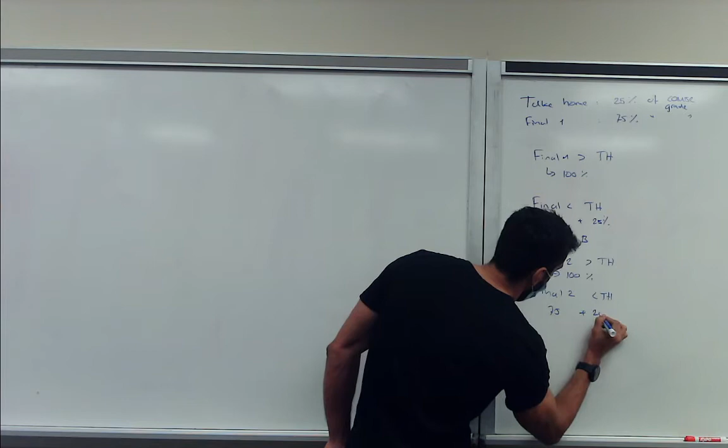So, okay. Say, for example, if this is, say, a B or so, and you're not satisfied, you can opt in to take the final two exam. And then the same principle applies. If your final two is higher than your take-home, then it's 100% of your grade. And if your final two is lower than your take-home, then it's again 75% plus 25%. And if you still fail, then you fail. Then I see you in the fall semester as well.

So, say for example, you got a B here, you got a C here. So you just had a bad day. Then this still is valid. So, in theory, your second final cannot hurt you. But I do ask, if you're gonna do this exam, just take it seriously. So don't just show up and do the exam, because it just gives me extra work.

So if you're not gonna take it seriously, if you're like, I'm satisfied with a B, just don't do it. Saves me my time. But you're free to do it. So I cannot stop you, I won't stop you, but I just ask of you: if you're gonna do it, make sure you study for it and you take it seriously. So it's not something just adding work for me.

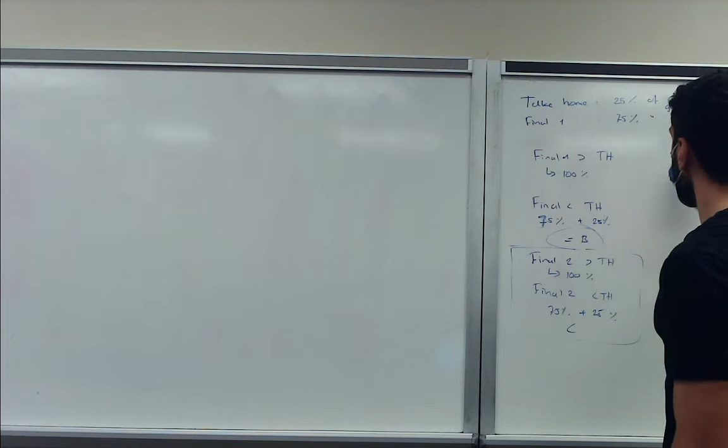It's a very unique grading system. Yeah, it is. It's definitely something that you don't often see here. And the reason is, I really don't like homework being part of your final, because I think homework should be something that you do on yourself to make sure that you learn the topic in a proper manner.

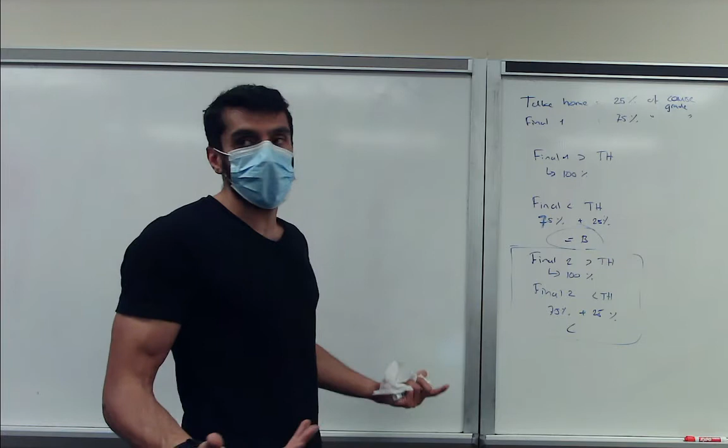And the same thing, why I don't do just one final. I think here in the US, because you fail and you have to wait a whole semester, I don't think that's fair. Everybody can have a bad day. I've had bad days where I know a topic and just go into the exam and have a bad day and I fail. So I don't think that's fair either. So I think in this way, you can get something of the homework. So it gives you incentives for doing the homework or the take-home exams and doing well on those.

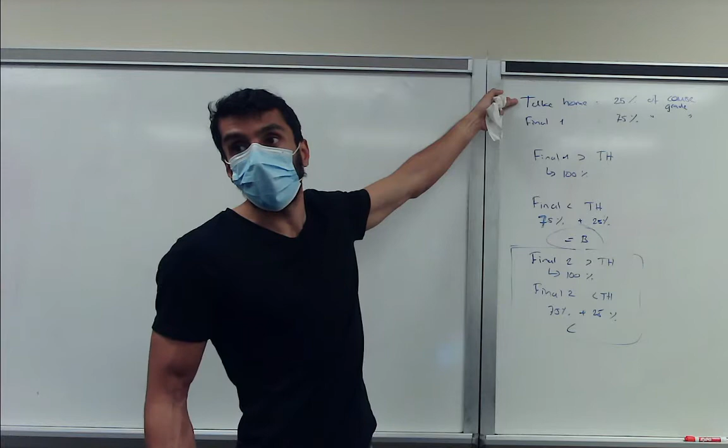And at the same time, if you have a bad day during the final, you always have some catch up. And sometimes you didn't get it, but the final will be comprehensive of all the topics. So if you can showcase on the final that you understand all the topics, I don't think the take-home should bring you down just because back then you didn't understand it fully. So I think this is in the benefit of all the students, and gives you incentive to do the homeworks, and also doesn't punish you if you just have a bad day. That's a very good reasoning.

I like it. Okay. So for today we're gonna continue doing some problems. I'll focus on one shear and one torsion. I'm gonna focus on the torsion, so I would definitely wanna get that in as well. And the shear problem, worst case scenario, if we don't finish it, yes, sorry.

Will the final be in class or online? I haven't decided. Originally, it should be in class. That's my preferred. Given the situation, the university sent out that everybody should be back in school, but there's still people not vaccinated and stuff like that. So I don't want to risk anyone's health. So it might be again a take-home exam. If it is a take-home exam, it will be limited to 6 hours, so there will be a bit more time pressure. And it will probably be 6 hours in which the class fits.

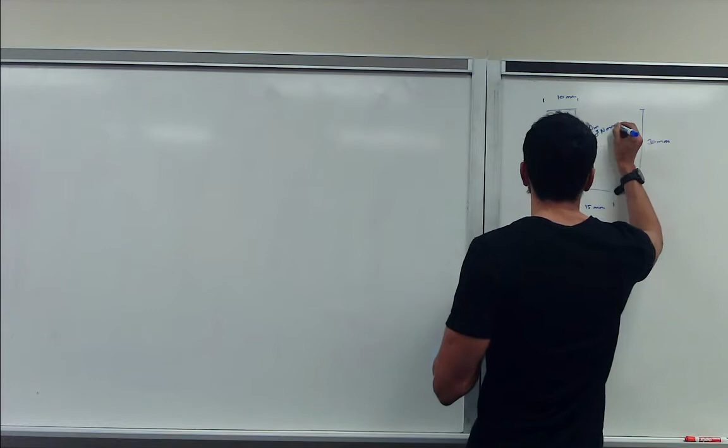So let's go for our Z section again. In this case, this is 10 millimeters, this is 15 millimeters, and the height is 30. You have a couple of things given: we know there's a torque acting upon this section of 100 Newton meters, that's 100 times 10 to the power of 3 Newton millimeters. One thing we always suggest is whenever you have given problems or variables, stick to one unit. I think millimeters is always the best option, especially for shear flow problems, unless the numbers get very large, like 1000 or 2300, then go for centimeters or meters in the worst case scenario. But yeah, this is what I would do.

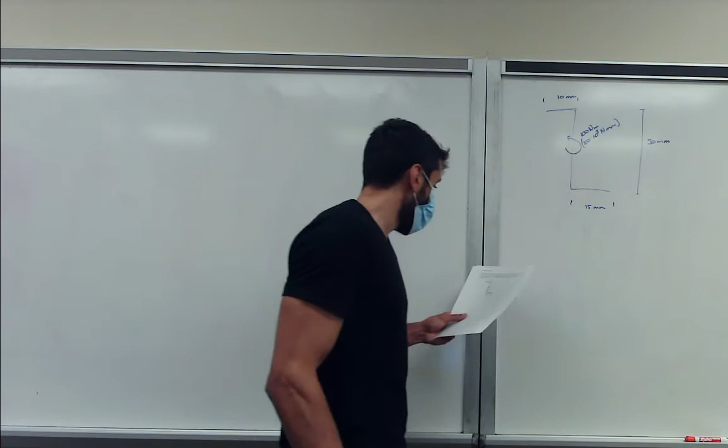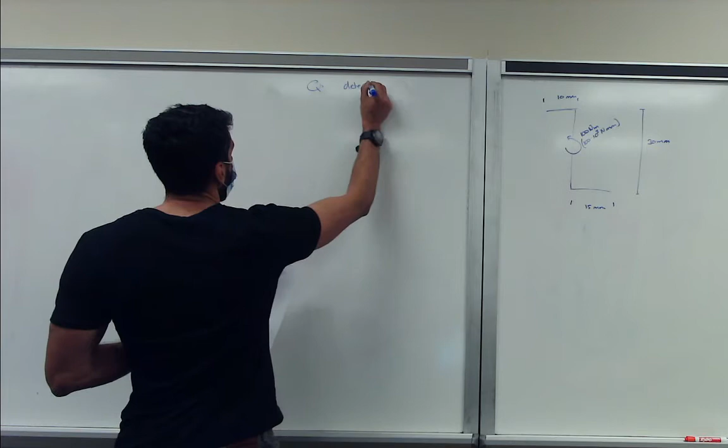So the question is, let's write that here: determine the shear modulus of the beam. So we don't calculate any shear flow etc, we basically have to calculate what the shear modulus is, and that's G. It will pop up in one of the equations, so we can isolate that and determine it.

So a couple of things are given: first of all, thickness is 1.3 millimeters everywhere. We also have given that if we apply that 100 Newton meter torque to it, and the beam has length L of 0.7 meters, it rotates a theta of 1 degree.

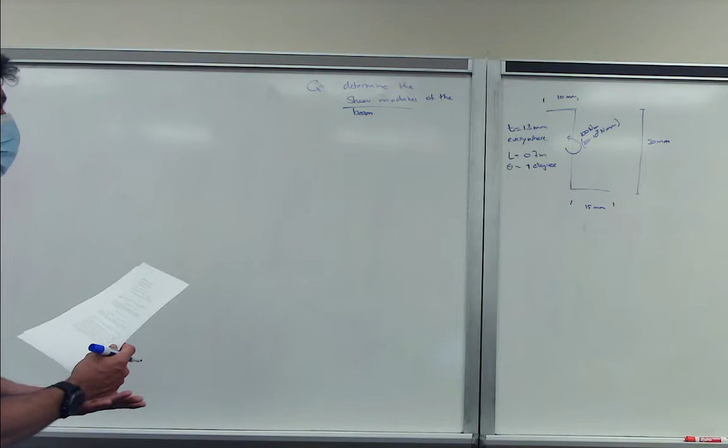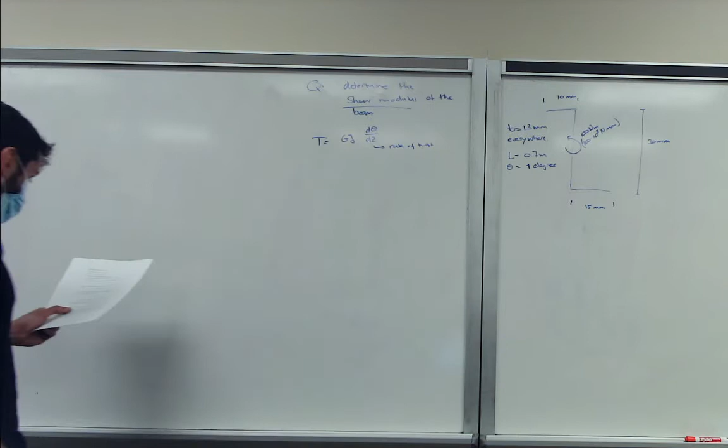So this is what we have to do, and there are a couple of steps we can use to solve this problem. First of all, the question is basically to determine the shear modulus. We know that torsion is equal to the shear modulus multiplied by the torsion rigidity multiplied by d theta dz, and this is our rate of twist, which is rotation per unit length, or rotation per meter.

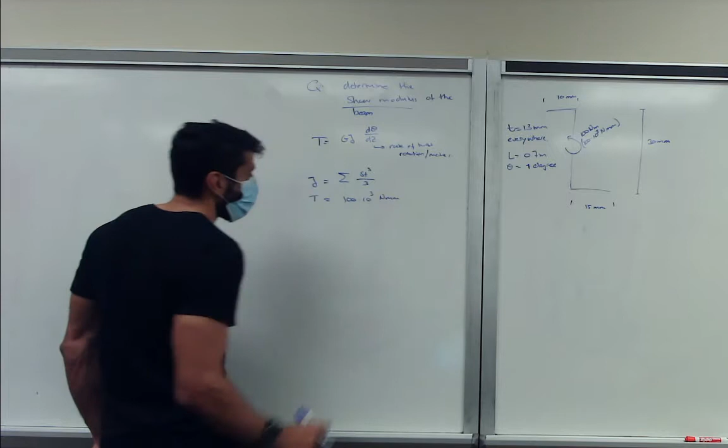If you look at the equation that comprehends this problem, we have torsion, shear modulus, torsion rigidity, and d theta dz. D theta dz we can determine from the length and the degree of rotation. G is the unknown. The torsion rigidity we can determine, that's equal to the summation of st cubed over 3. The torsion is already provided, 100 times 10 to the 3 Newton millimeter. Shear is unknown, and d theta dz we have to determine.

D theta dz in this case will be 1 degree of rotation over the length, which is 1.429 degrees per meter. We have to convert to our standard unit, radians, so we multiply that by pi over 180 to get the correct units. This gives us 0.025 radians per meter, or if we're consistent and go to millimeters, we get 2.5 times 10 to the minus 5 radians per millimeter.

So basically what we have is one equation, one unknown. We can solve for it. Very simple. So let's also fill in our torsion rigidity.

That's J. There's an open section thin wall beam, so it's basically the summation of S times T to the power 3, where S is our segment, T is the thickness of the segments, over 3.

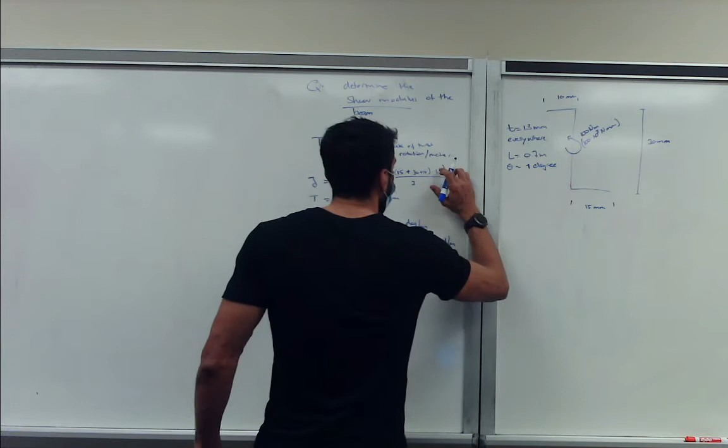instead of 1.5. Which are you talking about? The thickness is 1.3 millimeters everywhere, but you put 1.5. Oh yeah, you're correct, I don't know why. 1.3. But the answer is still correct, 40. Yes, it's 1.3 in my work notes.

So that's equal to 100 10 to the 3, over 40.28, multiplied by 2.5 times 10 to the minus 5. And this will give us a number of... let me see, yeah, 9.9 times 10 to the power 7.

And since we are working in millimeters and newtons, this gives us Newton per millimeter squared. So there's actually a follow-up part of this question: does this make sense?

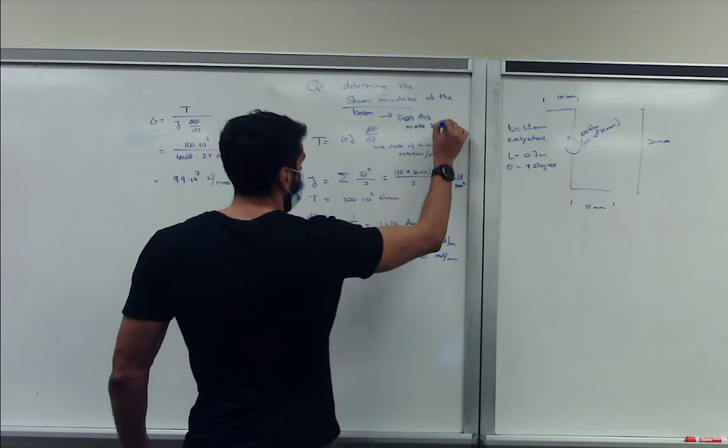So we have 9.9 times 10 to the power 7, which means this is Newton per millimeter squared, which is megapascal. So this is 9.9 times 10 to the power 7 megapascal. If you convert to gigapascal, it's 9.9 times 10 to the power 4 gigapascal.

And then you should basically see that this does not make sense. There's no material that has such a high shear modulus. You have to think about it, like... did I write it down? Yeah. So steel, for example, the shear modulus is around 80 gigapascals. The shear modulus of aluminum is around 25 gigapascals.

So if you want to basically design this beam for that kind of load and that kind of rate of twist, it's just not possible.

So what you do is basically, what you go from here, is you could plug one of these G's in and determine, for the length and for the torsion, what the rotation angle would be. You can plug it in and reverse engineer the rotation angle, and then you'll realize that with this load again and this length, that would also not make sense, because then the structure would rotate like 7 times.

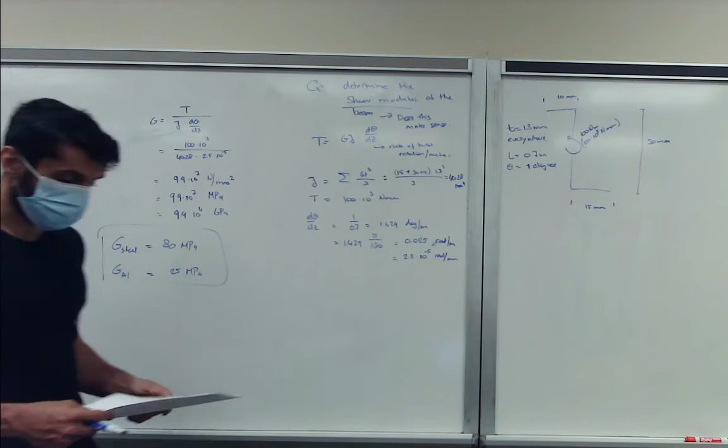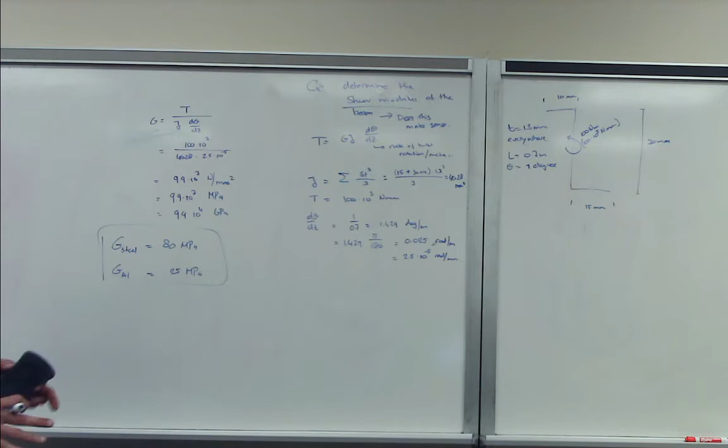And I realized actually when making the exam, or trying to make the exam, that with torsion they will be somewhat limited because we haven't discussed multi-section problems, and that's where torsion often comes into play as well. So I will ignore that section and just focus on the torsional problems we discussed so far in class, and I don't want to bring up any new problems before the exam.

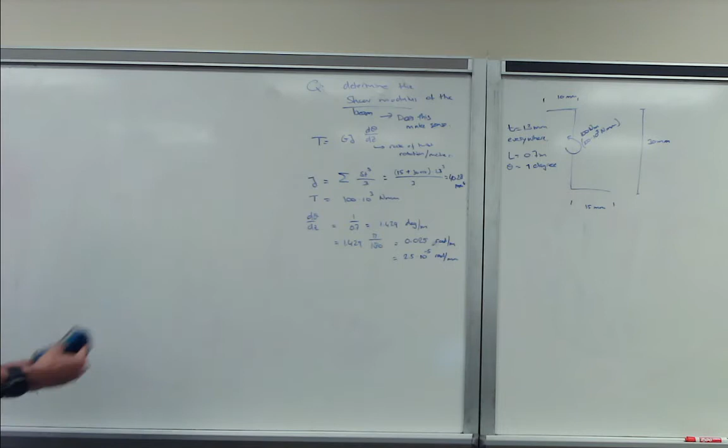So with that said, you can assume that it will be heavily on shear, and there will be just one problem maybe with torsion related to it.

After this lecture, or after this exam, we'll also go into multi-sections. What happens if we actually have a wing structure with multiple cells, say cell 1, 2, 3? We'll discuss that, and torsion and rate of twist will pop up again. But for now, that's basically ignored.

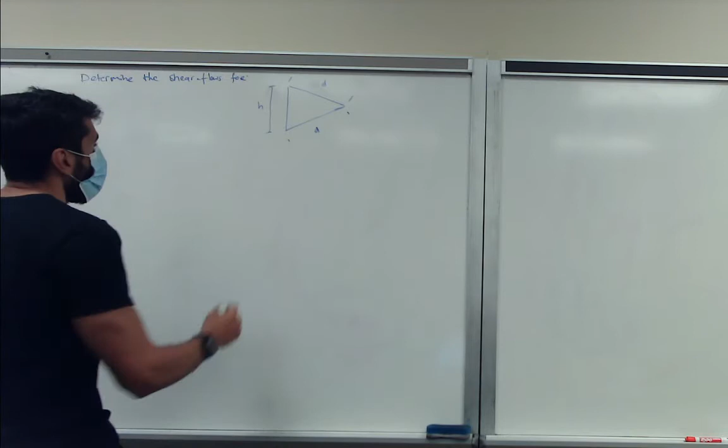With that said, let's do another shear flow problem. The question is: determine the shear flows for the given structure. We have a certain structure, a triangle. This is height h, and this is length d. This length is similar, so this is d as well. And we have a shear force acting on it at this location.

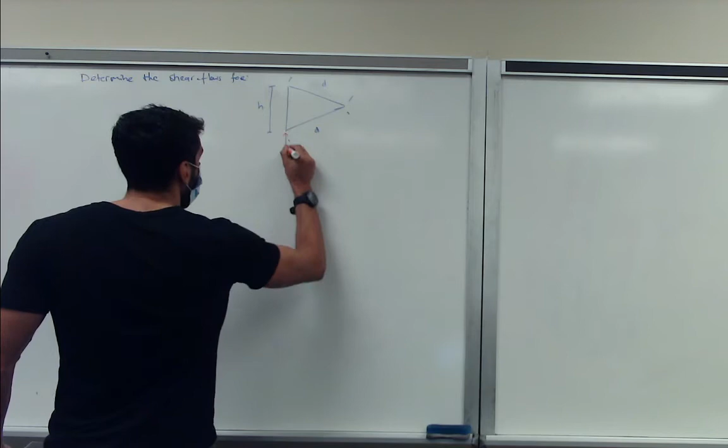Based on geometry, we have a closed problem, a closed section shear flow. So we know we have to make a cut to open the section, find QS or QB, find QS0, and add to get final results. So this will be QB plus QS0. That's the steps that should come up immediately into your mind, so that will be our procedure.

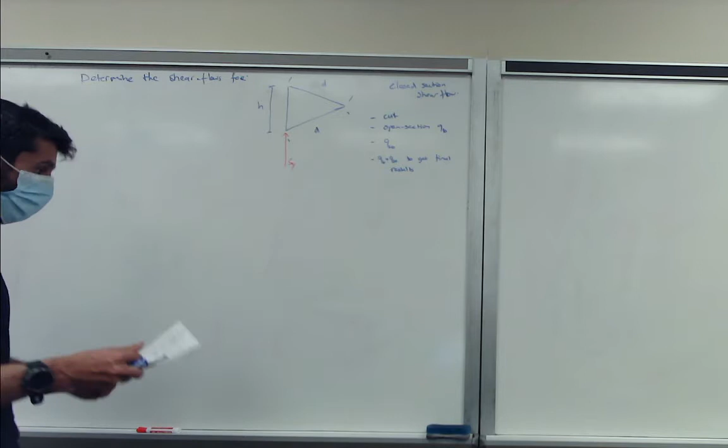Let's analyze our problem in more detail. So we have our solution procedure. What do we know about our shear flow problem? Well, we know it's symmetric. We have one axis of symmetry, so let's use that. We have no shear force in the x direction given, so we can use that as well.

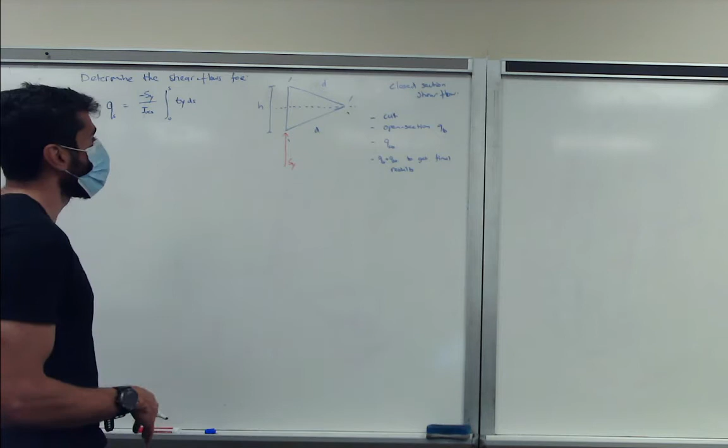So our shear flow equation becomes minus sy over ixx, integral from 0 to s of y ds. Since this is the equation we can utilize, there's no need to calculate moment of inertia yy, because it's symmetric, ixy is 0. So: symmetry, ixy 0, no sx given. That's also an additional observation that we make.

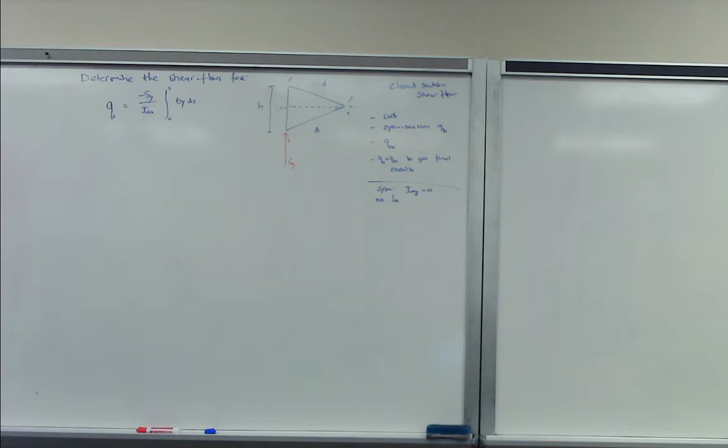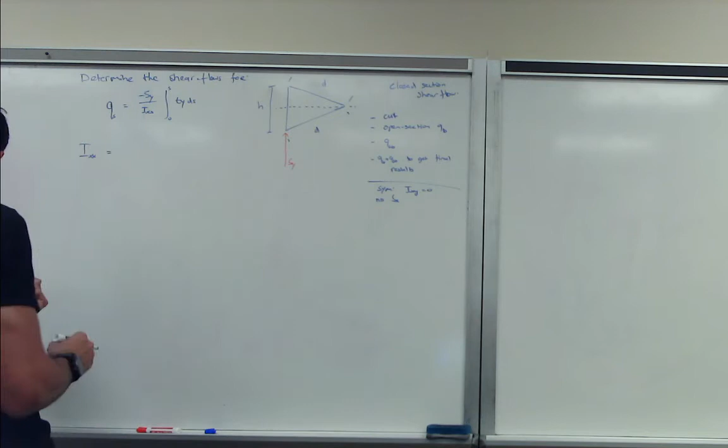So let's calculate the moment of inertia. In this case, we have our straight section that we can use with basically 1/12. And then we have to deal with the sections. Let's give them names as well. Let's call this point 1, point 2, and point 3.

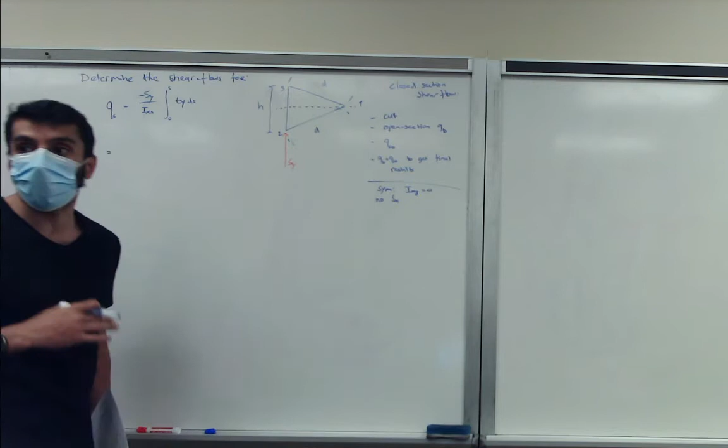Do I need to find the centroid first? No, because the centroid is with respect to y, and we know it will lie around the x-axis, so we can easily find it. The centroid will be somewhere here, but since we're not dealing with any y disturbance, we don't need it.

So let's calculate. The 2-3 section is easy, that's 1/12 bh cubed. We also have to define the thickness, which is everywhere t. So in this case it becomes 1/12 h cubed t.

We know from our second moment of inertia lecture that the moment of inertia ixx of our cross section equals the moment of inertia xx in 2-3 plus moment of inertia xx in 1-2 plus moment of inertia xx in 1-3. We also know moment of inertia in 1-2 equals moment of inertia in 1-3, based on symmetry. So we basically have to calculate what 1-2 or 1-3 is. Let's do that.

So for 1-3, let's go with the integral format, y squared dA. There's a formula, and you have to be careful with how the picture is given on the formula sheet, because there's an existing formula to determine this immediately based on the variables given, so you don't have to do the integral format. But I want to emphasize feeling comfortable doing the integral format, so we have to define what y squared will be.

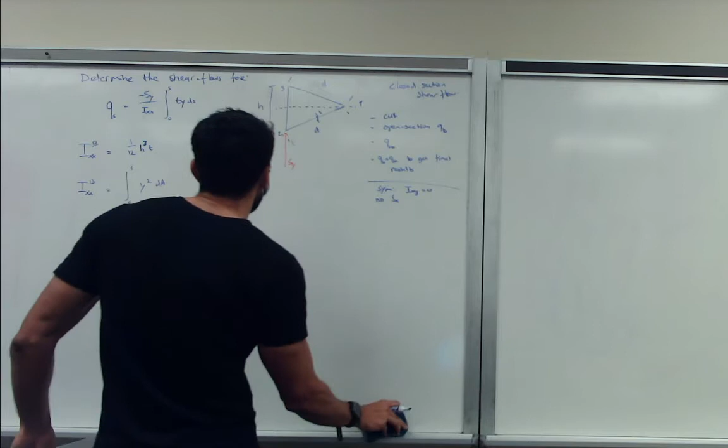So let's look at the cross section again. We have a geometry with central symmetry, so we can define this as alpha. If we define this as alpha, then y is equal to... if we go from S1, in this direction, this will be equal to S1 multiplied by sine alpha.

So one step is calculating sine alpha, or just going with sine alpha. Another step is, how is sine alpha defined? Well, sine alpha in this case is defined as h over 2d.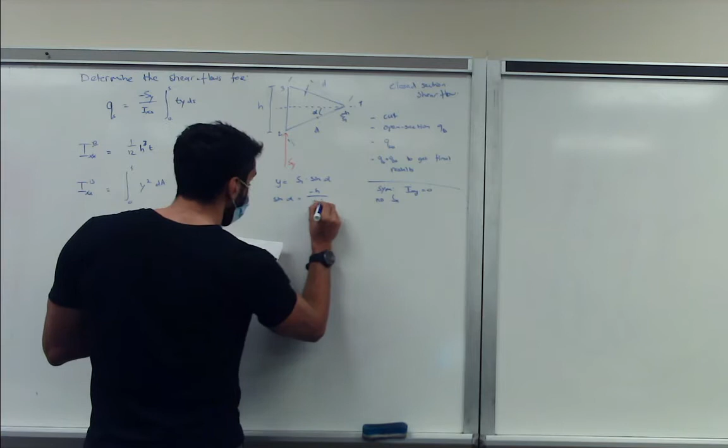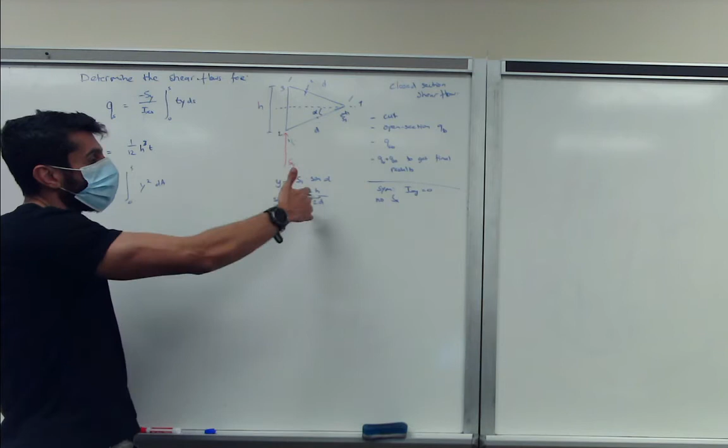So let's do that. And then, of course, our segment bound goes from 0 to s, which goes from 0 to d. So our integration bound, if we fill this in as well, goes from 0 to d. And then we fill in this equation. So if we do it correctly, we get S1 times sine alpha squared dA. This becomes 0 to d of, now we substitute sine alpha, S1 multiplied by minus h over 2d, squared.

And the area is nothing else than t times ds. If we take a segment on this line, this area, if we blow it up, that's the thickness multiplied by our segment ds that we take out. So our dA becomes t times ds. So that's a coordinate transformation that we apply here. So we get t ds1.

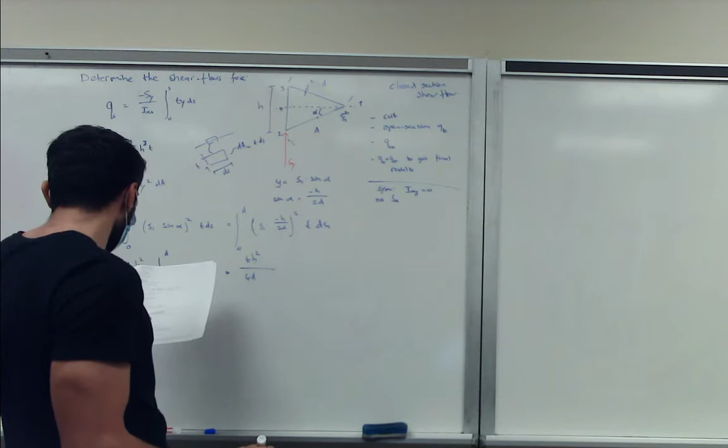s1 to the power 3, evaluated from 0 to d, of course. So if you plug in 0, it's 0. If you plug in d, what we get is t h squared d to the power 3 over 1/3 times 1/4, so that's 1/12. And here we have d, so we can basically cancel out one d, so this becomes d squared, and this d disappears.

So why was the d in the denominator not squared? It should be. And this becomes here. That's correct. So yeah, there should be a d squared here because we multiply this squared sine. No, you're correct. It was a mistake on my side.

So now we know the moment of inertia for our cross section. Let's just call that Ixx. So it's 1/12 h cubed t plus 1/12 h squared t d. And then you can simplify it a bit. Sorry. This is for segment 1-2, so this must be multiplied by 2 because segments 1-2 and 1-3 are the same. So we use that to our advantage. So that's the 2 here.

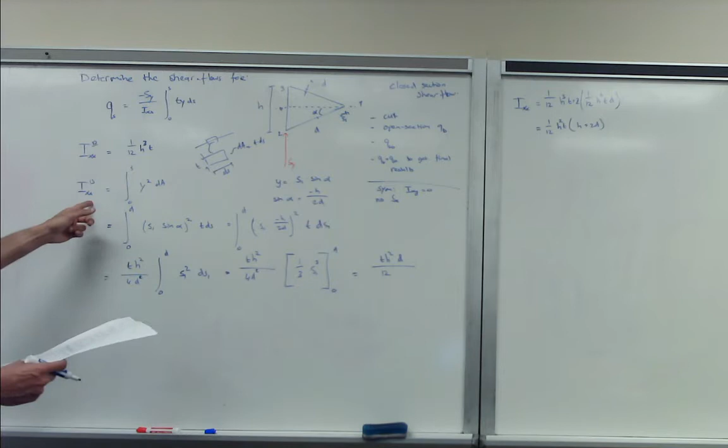So importantly, it might seem like a very complicated structure to calculate our moment of inertia from, but the total moment of inertia is nothing else than the summation of the components. So the 1-2 section, then the 2-3 section. The 2-3 section is directly obtained by 1/12 h cubed t, and then for 1-3 we said 1-3 is equal to 1-2, and we can calculate that as well. And then at the end, we just summed up the different components. So now we have our moment of inertia.

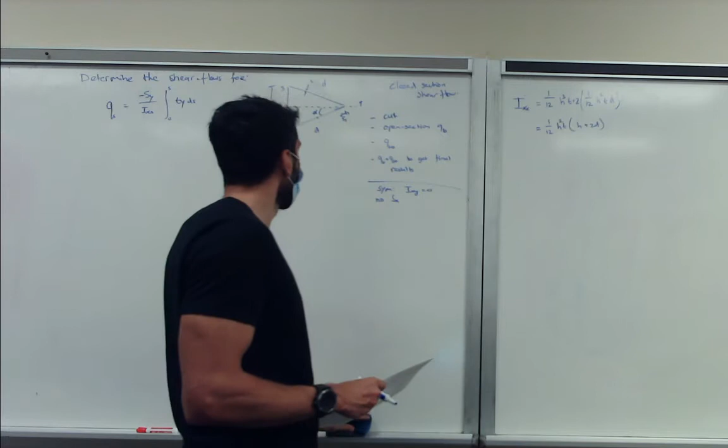The next step is basically following this procedure that we wrote down here. So we're going to make a cut, we're going to do open sections, we're going to find the correct shear flow. So let's do those steps now. And then the question is, where are we going to make a cut? As mentioned in a previous lecture, we want to do it around the symmetry point, so we can make our life easy. So the best location in this case would be at point 1. So we can calculate 1-2, or 1-3, and then 2-3, and then the rest we can find by symmetry.

So we know at the starting point, qb1, that's of course our cut, so that's equal to 0. So now let's do segment 1, 2. So qb12, that's equal to our starting point, which is 0, so we ignore that, plus this section. So that's equal to minus Sy over Ixx. What's that? It's 1/12 h squared t (h plus 2d). And then we have to evaluate the integral from 0 to s for segment 1, 2, and we multiply by ty ds. So 0 to s, ty ds.

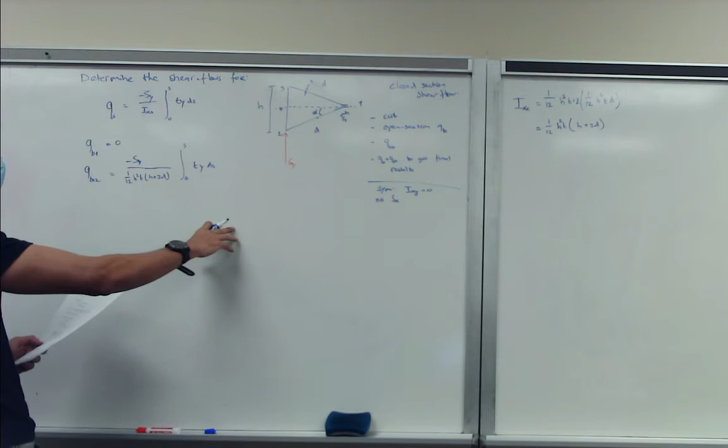So in this case, we already identified that y is equal to s multiplied by sine alpha. And we know for s1, that's equal to s1 multiplied by minus h over 2d. So what we can do is just substitute this into here and then do the integral from 0 to d, ds. Okay, so we plug these values in. So Sy over 1/12 h squared t (h plus 2d). Now we substitute our new value for y. So it becomes 0 to s, t s1 multiplied by minus h over 2d, ds1.

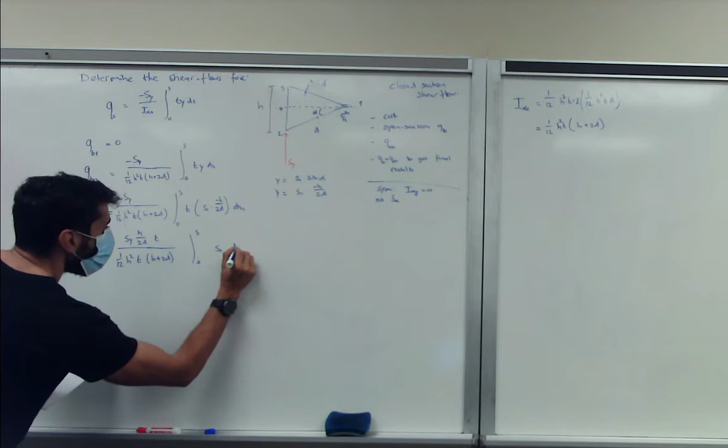So the minus cancels out with this minus. The t cancels out, so we can simplify this to Sy. And we have an h here and a 2d, so we get h over 2d. So I'm going to write the t in here as well, so we get h squared t (h plus 2d). And then we get 0 to s, s1 ds1. And you always want to do this to simplify your life. You can isolate the variables that are dependent on the integral and separate those from the variables that don't vary with the integral. And now the t in the numerator and denominator cancel.

And what we can also do is that this h can cancel with one of this h, and then the 2d we can take into our denominator, right? Yeah. So the 2d basically goes into here. The 1 over 12 goes up, so this becomes 12. And then we can divide 12 by 2, becomes 6. So there are a couple of minor mathematical manipulations you can do to get 6Sy, and then hd (h plus 2d), to get to this part.

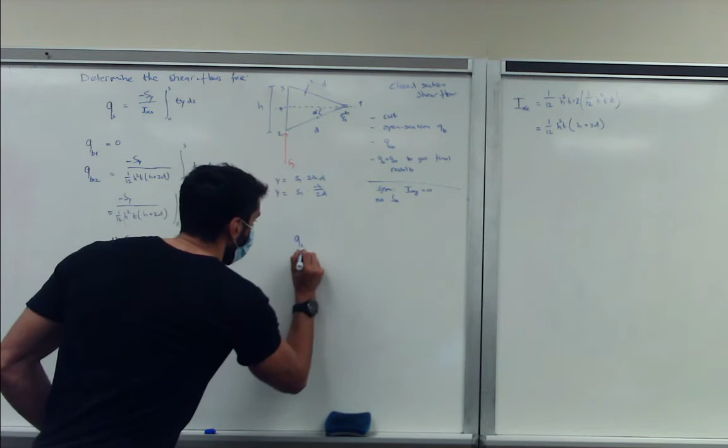And then if you evaluate the integral, of course, this becomes s1 squared over 2, evaluated from 0 to s1. And our bound for this segment goes from 0 to d. Let's actually still plug s1 in, because this becomes the equation for the segment qb12. Now, before we can start with qb23, we have to evaluate qb12 at s equal to d, because that's our starting point for segment 2, 3.

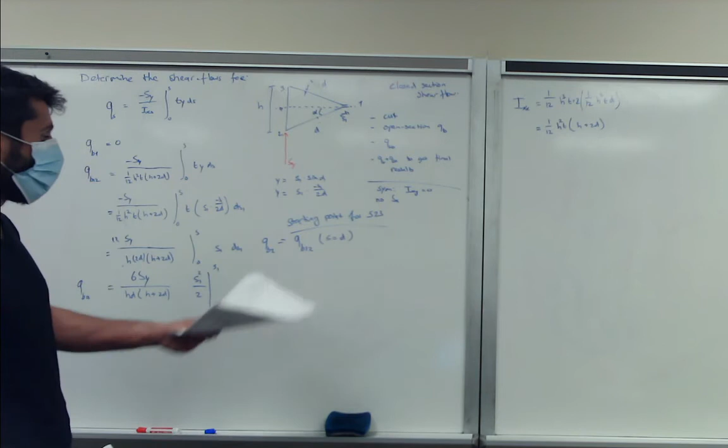So qb2 is equal to qb12 evaluated at s equal to d. Now we can fill in d in this equation and evaluate it. So if you do this, this 2 becomes 3, this becomes d squared, you have a d here, so you can cancel out one d. So you get 3Sy multiplied by d over h(h plus 2d). And that's our starting point for segment 2, 3. Does this make sense? Good.

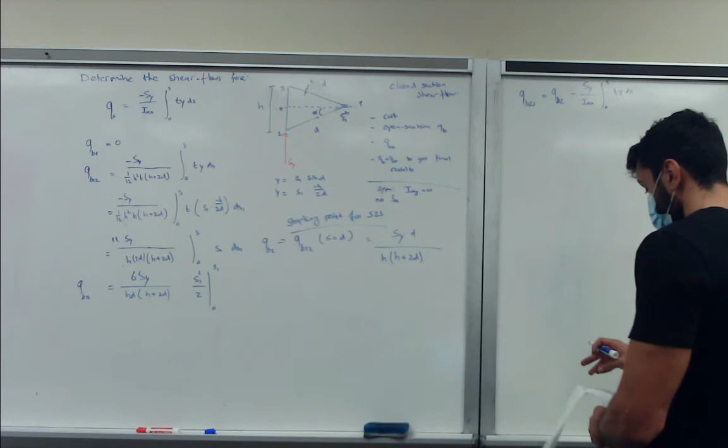So next step is calculating segment 2, 3, and 1, 3 we can define by symmetry, because that's equal to 1, 2 but opposite in sign. So let's keep that on board, erase this, and calculate qb23, which is equal to qb2, our starting point, minus Sy over Ixx, 0 to s, ty ds. In this case, y at point 2 is equal to minus h over 2, and y at point 3 is equal to h over 2. So y is equal to minus h over 2 plus s2, and s2 goes from 0 to h.

Good. So now we can plug it in immediately. qb23. This is a 3, by the way. We got a 3 here. So we get 3Sy d over (h plus 2d), minus, and then what we can do is start with this section, because, nope. Let's see.

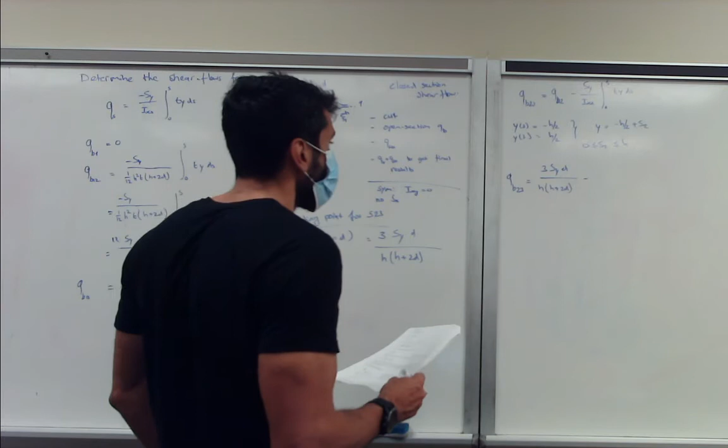This becomes 12. The T still disappears. Okay. Yeah, let's start there. So this becomes 12 Sy, a bit easier. Let's keep it Sy over Ixx for now. Let's evaluate the integral. Becomes 0 to s2, t, and then y is defined as this.

So we get s2 minus h over 2. It's still visible. ds2. So this will be the same. Let's evaluate only the integral, Sy d over h plus 2d minus Sy Ixx. And then what we get is t, and this becomes s2 squared over 2 minus h over 2 s2.

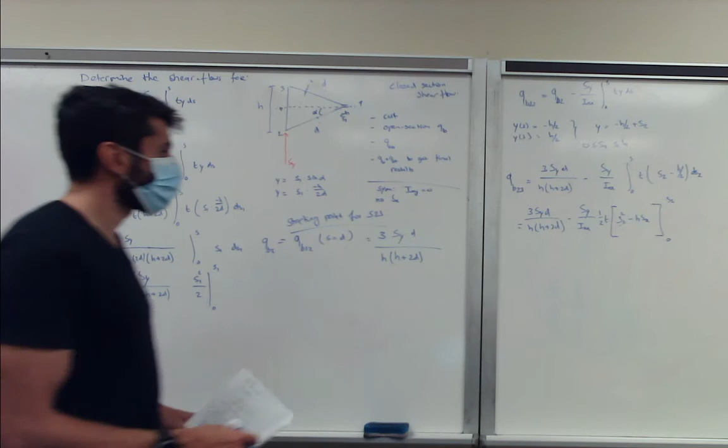So we can take basically 1 over 2 out of this bracket. So we get 1 over 2 here, and then here we get s2 squared minus h s2, evaluated at 0 to s2. And now we can plug in this, what we had here. So in this case, the thickness will disappear with this thickness here. The 12 goes up, and then over 2, so we get 6.

So Sy d, h plus 2d. This becomes 6 Sy. T will cancel out. So we get here h squared, and then h plus 2d. And then this remains the same, s2 squared minus h s2, evaluated at 0 to s2.

And then if you want to calculate point 3, so QB3 is equal to QB2,3 evaluated at s2 equal to h. And if you plug this in, you will get, of course, because of symmetry, the same value. So you get 3 Sy h plus 2d. So this becomes h squared minus h multiplied by h, so this part is 0, this drops, and you still have your starting value.

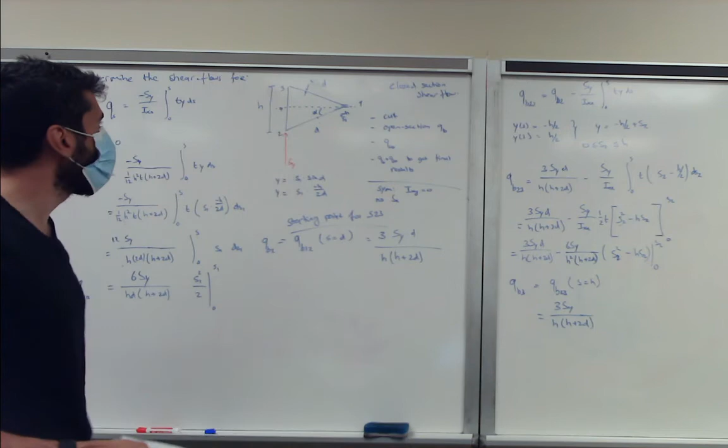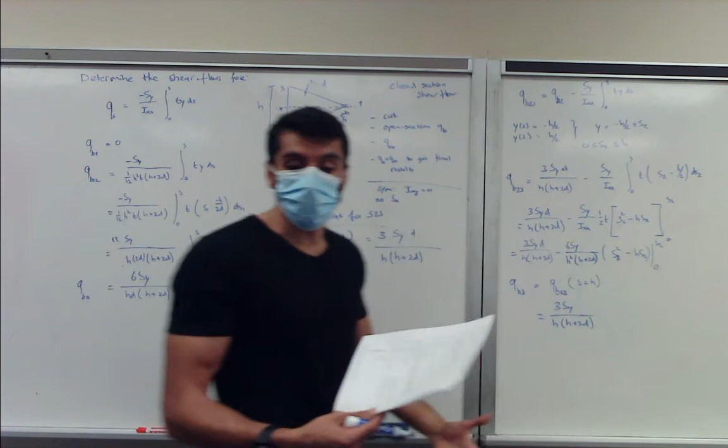Which makes sense. Afterwards, it's also very good to do, especially when you have a symmetry problem. In this case, segment 2, 3 is basically our symmetry segment. Evaluate it at the end point, and you should get the same answer as your start point. So if something goes wrong, then you probably did something wrong here in the integral formulation. So it's basically a double check for yourself.

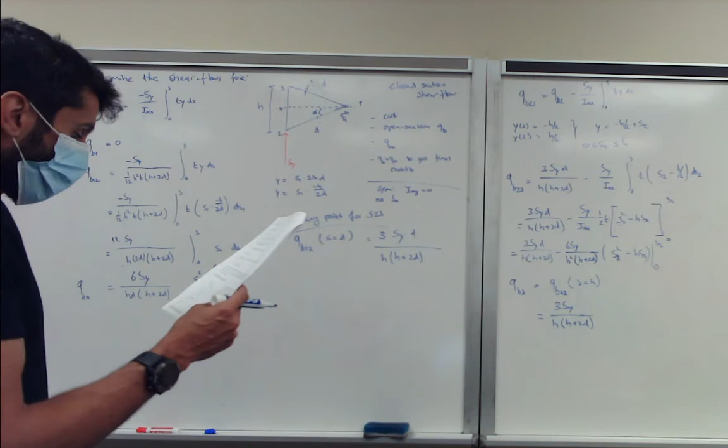Okay. Now we did the cut, we determined our open sections, and now we have to determine our correction shear flow. So while I erase this, can you guys think about what location would be the best to do the moment equivalence equation around, which point and why?

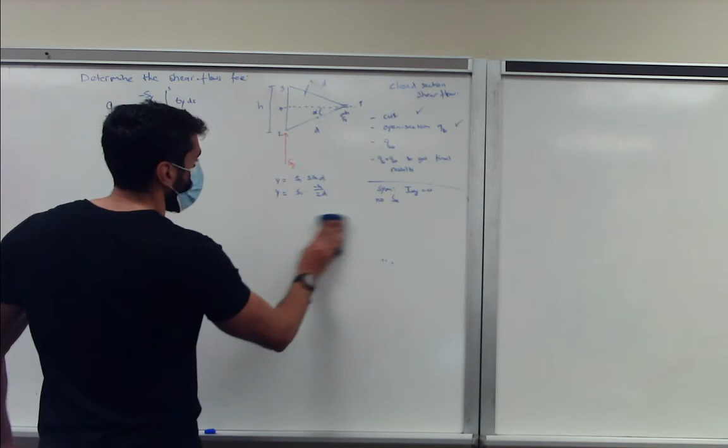The shear is flowing to the end point of the triangle. So where you have those two lines in that triangle? Which point? 1, 2, 3. Oh, 1. Okay, that's good. So the reason why you should pick 1, as mentioned before. So let's draw our shear flows into our segment, right? So we know there's a correction shear flow qs0, and we must calculate this one.

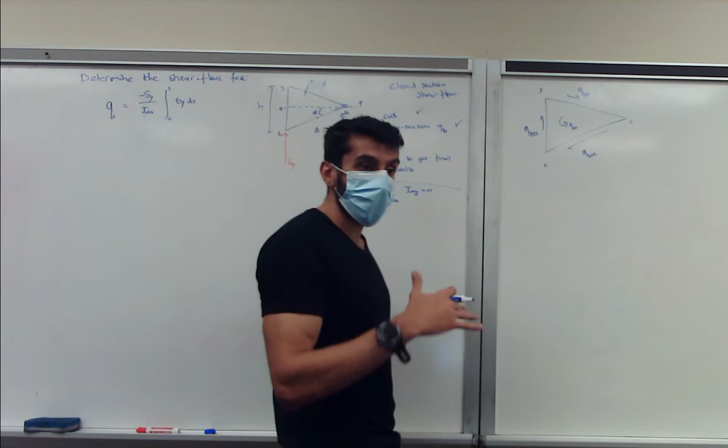But what are the existing shear flows? Well, we know that this was positive. We started with 1, 2, went to 3, and then we went to 1. So this was QB1,2, this is QB2,3, and this is QB3,1. So with the correction shear flow, we said we're going to apply moment equivalence between the external applied shear force and our internal moments due to shear flows.

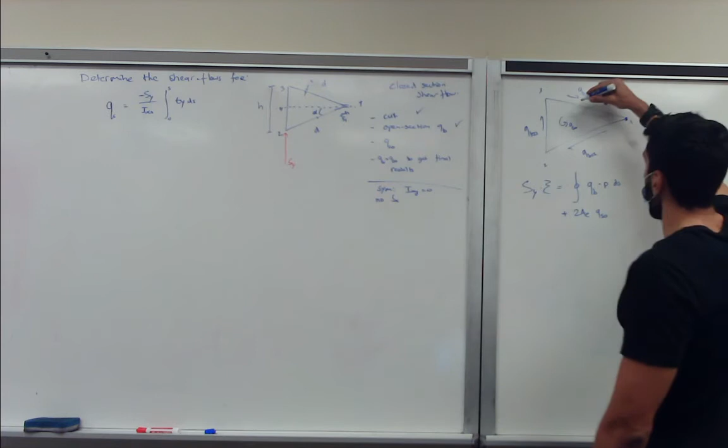So we said Sy times xi must be equal to our QB shear flows multiplied by moment arm p, integral around the cross section, plus 2 times the enclosed area qs0. So now if you take the moments around point 1, the shear flows QB12 and QB31 go through point 1. So they don't have a moment arm. So those become 0. So now the only one you have to take into account is QB23.

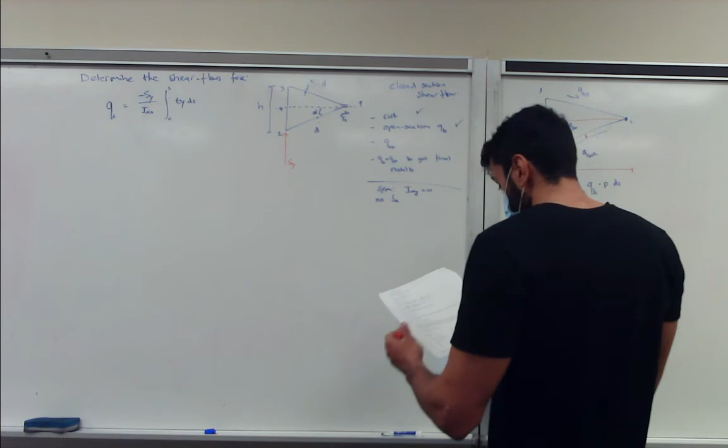So this part of the equation is now significantly reduced in complexity. You have just one term, and that moment arm is equal to this distance from this center point to 1. So let's draw that with red. So the moment arm is this segment here. And we know that this is equal to d. So this segment L is equal to d cosine alpha. And alpha we already had identified earlier. So we basically have a very simple equation.

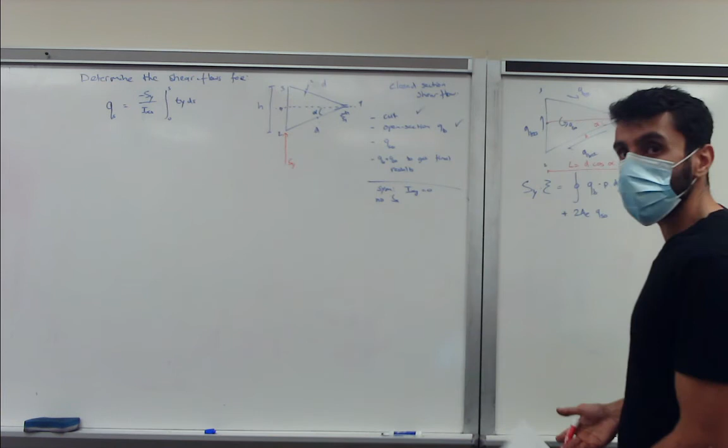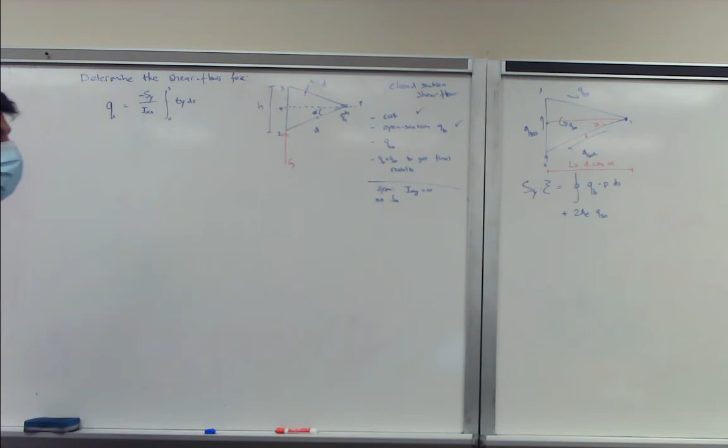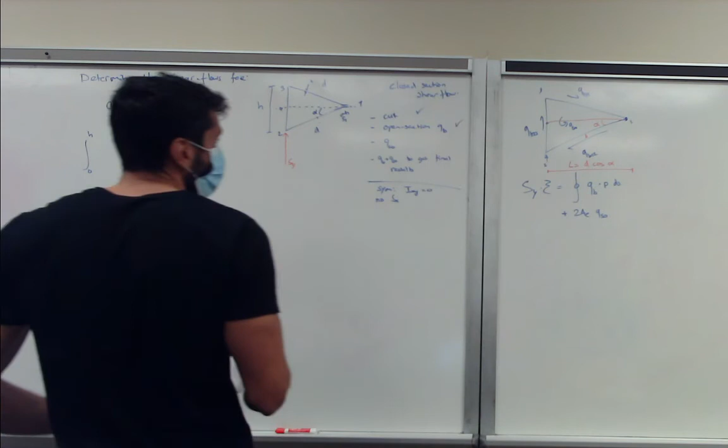Okay, so let's write that out. And of course, Sy has the same moment arm L as L. So xi in this case is equal to L. So our equation becomes 0 to H, because that's the segment of our 2-3 section. So we multiply our shear flow by the segment it travels over to get our shear force, and then we multiply it by the arm to the point of interest to get our moment.

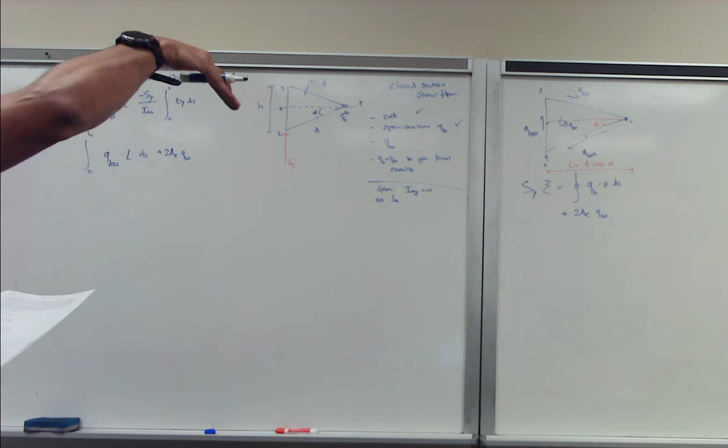So we get QB23 multiplied by moment arm L, and then of course the integral of ds, and then we do 2 enclosed area QS0. Let me see, goes counterclockwise, it's positive. That one's counterclockwise positive, so this is Sy, and this becomes L as well. Okay, so let's identify the enclosed area first. That's an easy step. The enclosed area of a triangle is half base times height, so it becomes 1 over 2 H times L.

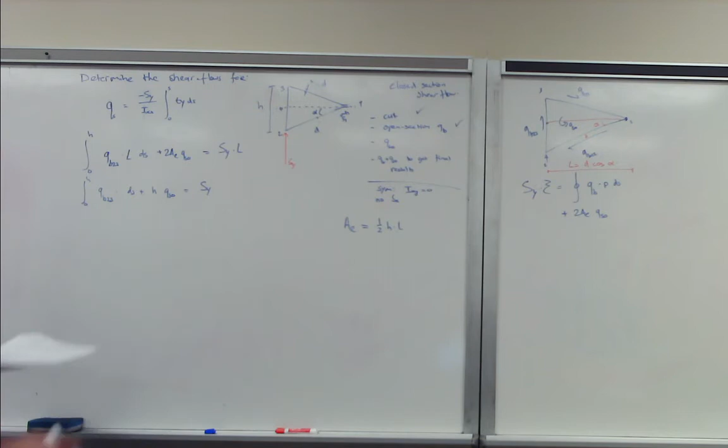So plug this in. 0 to H, QB23 multiplied by L, ds, plus the 2s cancel, so it becomes HL QS0 equal to Sy multiplied by L. So now we see that actually L appears in all the 3 components, so we can ignore it. So we can basically say divide by L, so the Sy, this becomes H, and this becomes QB ds. Now we substitute in QB. Well, actually, let's isolate the QS0. QS0 becomes Sy minus the integral from 0 to H QB23 ds over H.

Why did you take the L's out? Because they appear in QB times L, that's the moment arm. Here it appeared in the definition of enclosed area, and here it also is the same distance towards point 1. So you just divided by L. Yeah, so you can divide by L. It doesn't matter, just to simplify your life.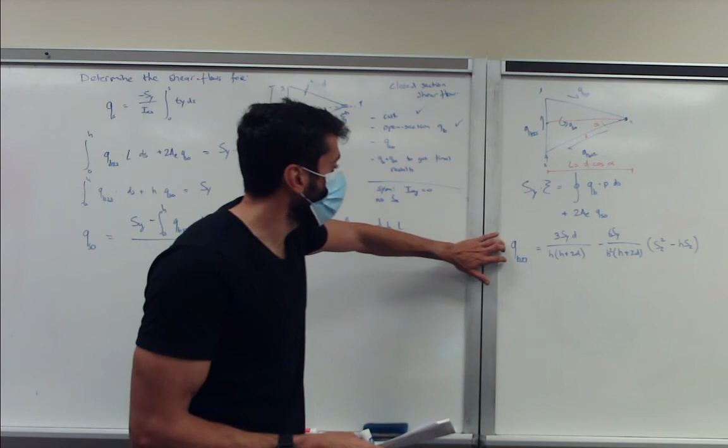And now basically we have to recall, let's do it on this side, what our QB23 was. QB23 was equal to 3 Sy D over H plus 2D minus 6 Sy H squared over H plus 2D, and then S2 squared minus H times S2. Okay. So another key point is you have to fill in the shear flow of that segment. It must be a function with an S term in it. So you cannot fill in the start point or the end point, because we take again the integral here in order to get the equivalent moment.

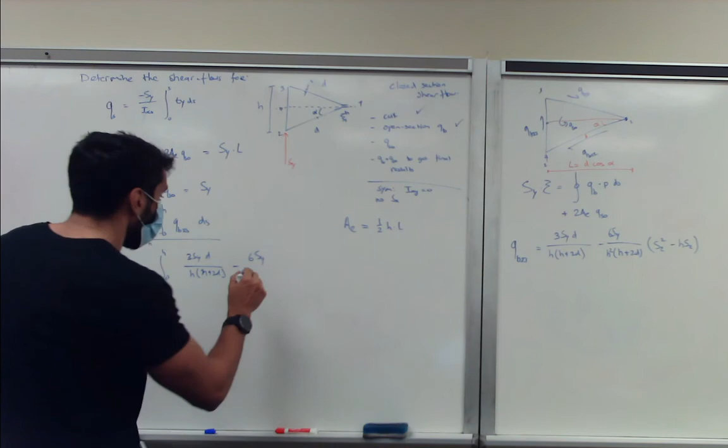So now what you get is, let's isolate Sy over H here. Sy minus, and then we get 0 to H, and then we fill in this integral: 3 Sy D over H plus 2D minus 6 Sy over H squared H plus 2D, and then S2 squared minus H S2, dS2, and this all over H. And this is a bracket here as well. So we know this is basically a constant, so this integral becomes S2. The S2 squared becomes 1 over 3 S2 cubed. H S2, if you take the integral, becomes H S2 squared over 2.

Actually, let's just isolate the integral here, 0 to H, dS2. So this becomes 3 Sy D S2 over H plus 2D. And keep in mind we have capital S and we also have lowercase subscript s. This becomes 6 Sy over H squared H plus 2D, and this becomes 1 over 3 S2 to the power of 3 minus 1 over 2 H S2 to the power of 2.

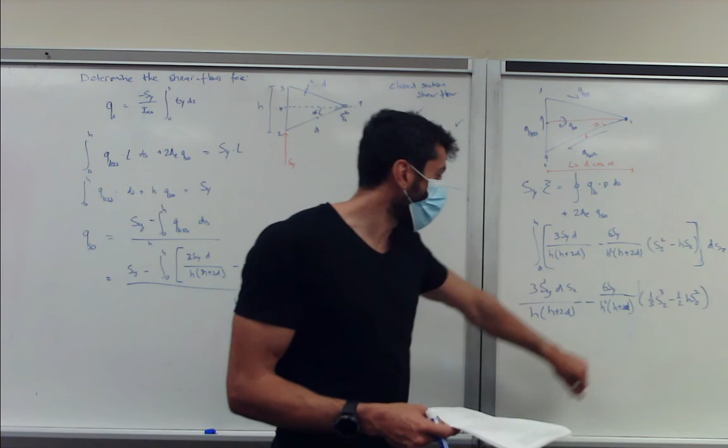And then basically what you can do is, let's see. I assume this direction. Because I had a plus here, I have to assume it's counterclockwise. Just a small thing. And what you have to do is just plug in this, evaluate at 0 to H. With 0, this whole term is 0. And if you take H into account, let's do another color, so we evaluate it at H. This becomes H. This becomes H to the power of 3. This becomes H multiplied by H squared, so this becomes H to the power of 3 as well.

So we get 1/3 minus a half. So what is this? 2/6 minus 3/6, so it's minus 1/6. So this becomes plus. This drops. So this becomes 1/6. We have the 6 here, so the 6 is dropped. So this becomes an H cubed. H squared can drop, so this becomes an H. Does that make sense?

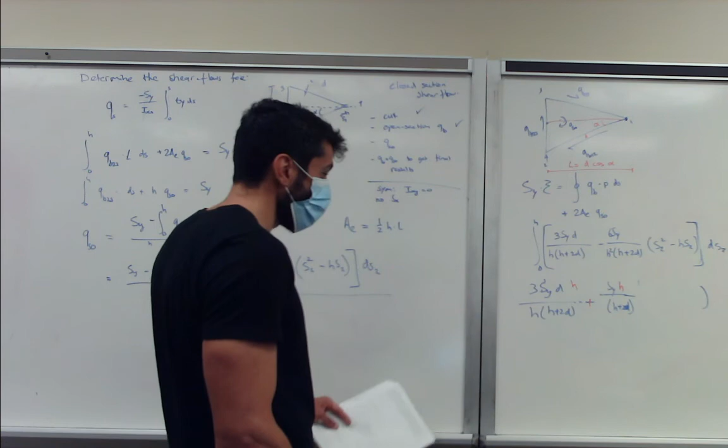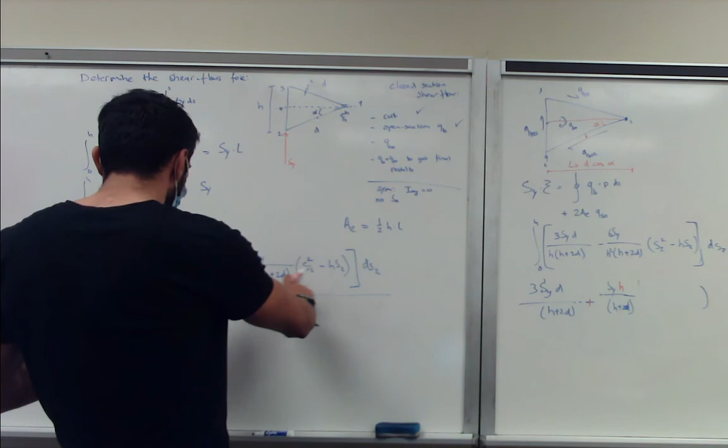Yeah, so far so good. This h drops here. I made an error somewhere. Let's see. Yeah, we have a d here. Let me double check. That's why this is correct. There's an h squared here, that's correct. And then we evaluate.

Yeah, I made some error. So this part is correct. So do the integral, and if you get a correct value out of it, what you should get is Sy d. I cannot find the error very quickly. Is h plus 2d, and there should be a minus here.

So over there, you said it was counterclockwise, but you drew it clockwise. So does that have something to do with it? No, this is counterclockwise now. Now the reason why I said I drew it incorrectly is because I used a plus here. Then this all needs to follow the same convention. So convention is counterclockwise positive. So this creates a counterclockwise moment, so it's positive. This will basically be counterclockwise shear flow, therefore it's also positive.

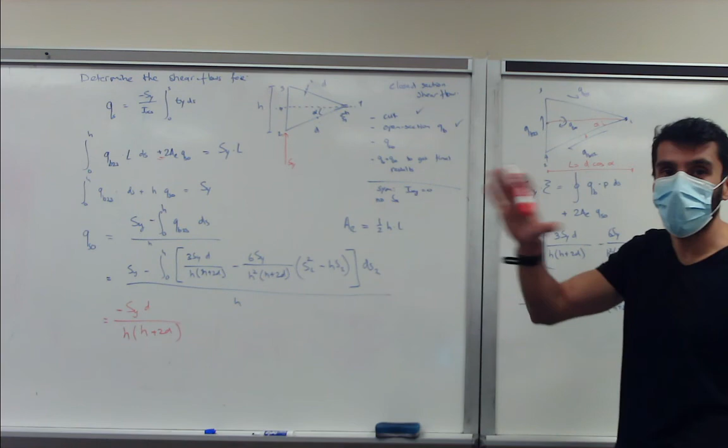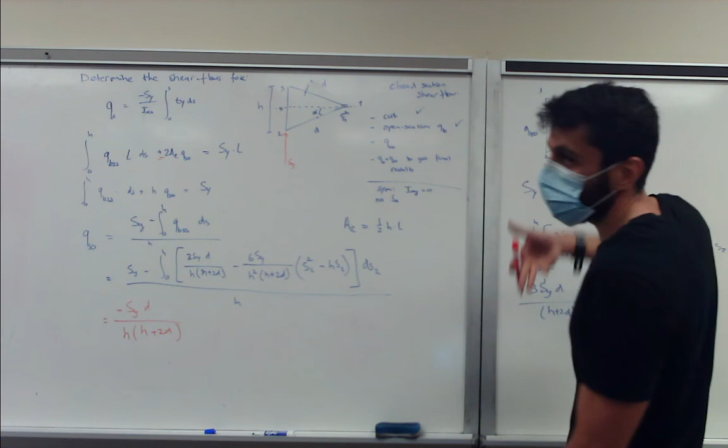Yeah, that's clockwise. Oh yeah, okay. As long as you're consistent. So in this case, I assume clockwise positive. Sorry. Yeah, you're right. Clockwise positive, because I assume in this case Sy being clockwise, so that one's positive, and then these internally are clockwise, so all of them are positive. If I had assumed counterclockwise positive, then this would have been a minus, and minus. Okay.

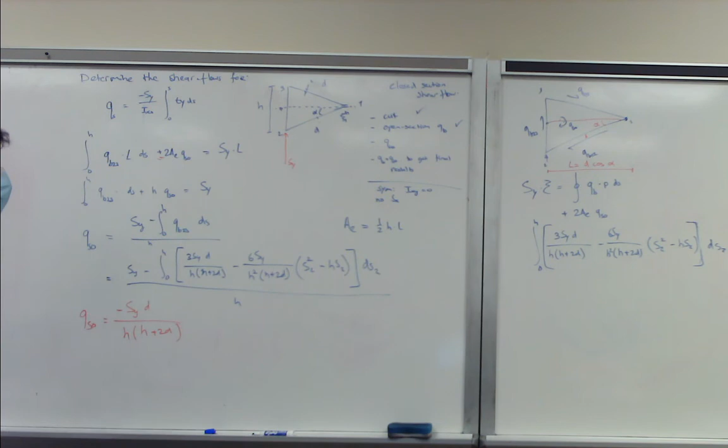So let me see what I did wrong here. A couple more minutes. Let me actually finalize the solution. So once we have the correction shear flow here, because this is a negative, you just have to be careful where you add and subtract. So in this case, the final shear flows qs12 will be equal to qb12 minus qs0, qs23 is equal to qb23 minus qs0, and qs31 is equal to qb31 minus qs0. Because there's a negative sign here, you subtract it.

So let's revisit this integral, what I did wrong. Let's see. What we can do is take out some terms: 3Sy over h plus 2d. Then we get here basically d, minus 2 over h multiplied by s squared minus hs. I dropped the subscripts for now. So if you do the integral and evaluate, this becomes h d h. This becomes 1 over 3 h cubed. This becomes 1 over 2 h cubed.

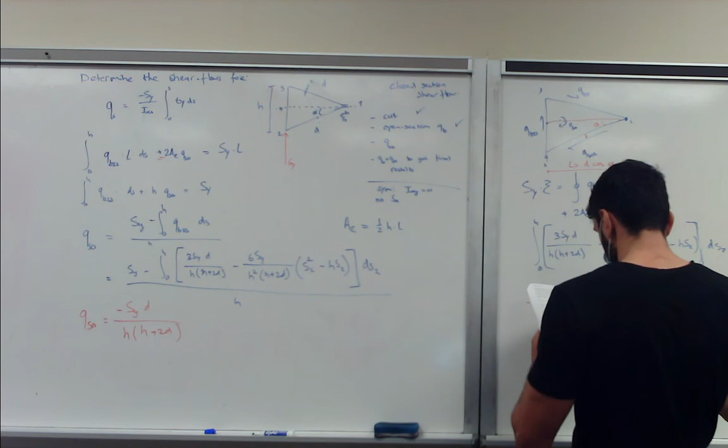Is this correct? Yeah. Okay, this becomes h squared. This h drops. This becomes 2/3 minus 1, so this becomes plus 1/3 h squared. Now you can divide by h, so this becomes h. Okay, there was just a small error, and then you can continue. You have to take this s into account. It will work out eventually. I just made a small error, but this solution is valid.

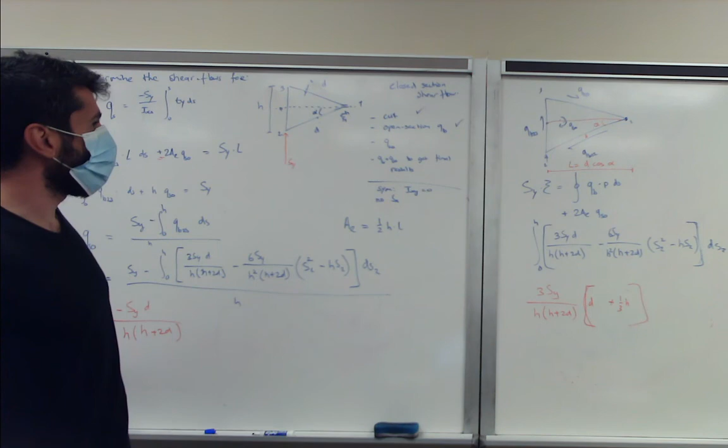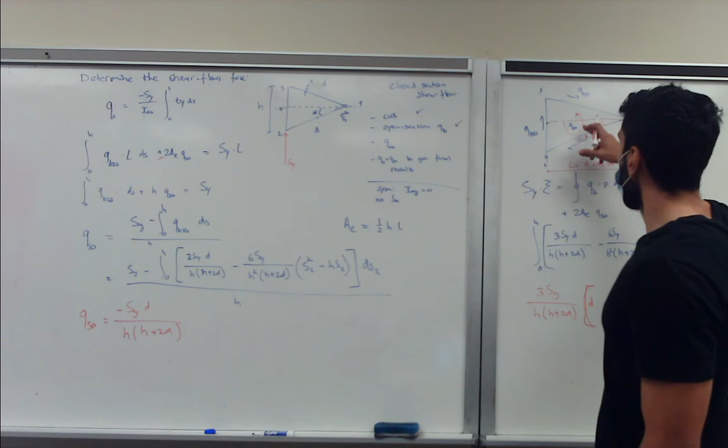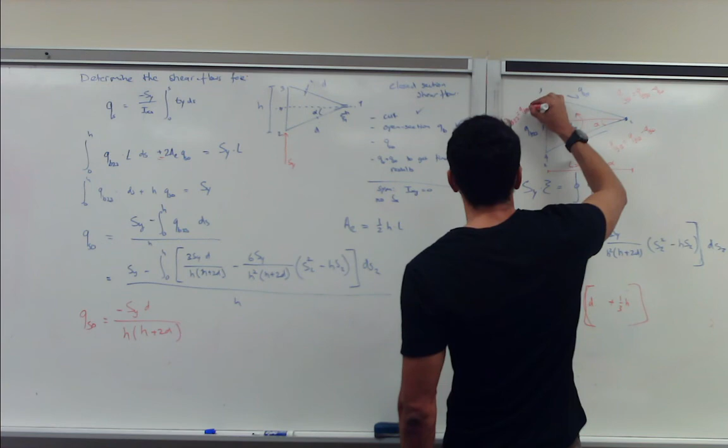And then, like I said, because this is negative, and in this case we assumed all to be clockwise, this one is actually counterclockwise, because a negative shear flow means nothing else than the shear flow goes in the opposite direction that you assumed. So because they go in the opposite direction, you have to subtract: qs31 is qb31 minus qs0, qs12 is equal to qb12 minus qs0, and similarly qs23 is equal to qb23 minus qs0, to get your final answers. And that would be it.